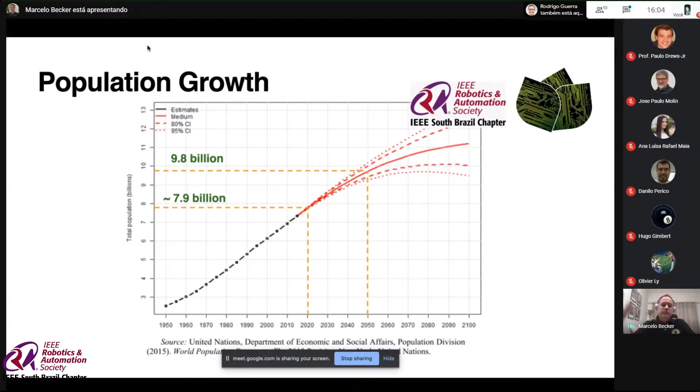But not only because of this did we decide to have this talk about agricultural robotics. It's because we have huge population growth. Today we are around 7.9 billion inhabitants on Earth, and by 2050 we are going to be almost 10 billion people. We need to feed all these people. If 5 years ago we had around 800 million people who couldn't get enough nutrients for a good life, today the situation is much worse. So we need to work on this.

According to the UN and FAO, we need to increase our food production by around 70% by 2050. But we should remember that increasing production doesn't mean increasing the production area. We need to increase productivity, and we need to take into account climate change and environmental issues.

So one good idea is to use robots. In our lab at USP in São Carlos, we work in this field, and we have many robots there—some we built, some we bought. But we know it's not easy to deal with these situations because we are talking about field robotics, and it's really tough to deal with the many problems we find in the field.

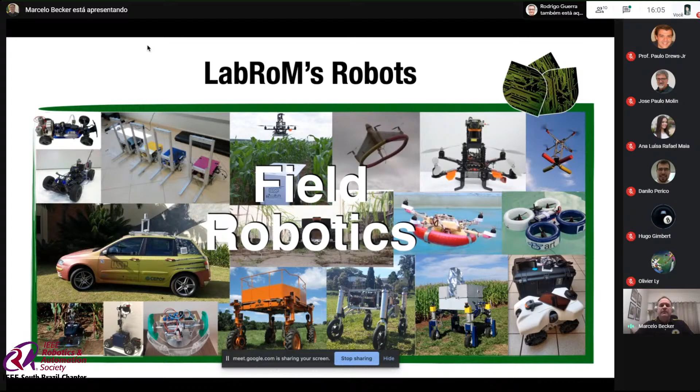So what's next in agricultural robotics? We have to face challenges: environment, perception, real-time response, sometimes autonomy, costs, and so on. Because of that, we invited great researchers from around the world to help us get an overview of what's happening, what's next, and how we can deal with this.

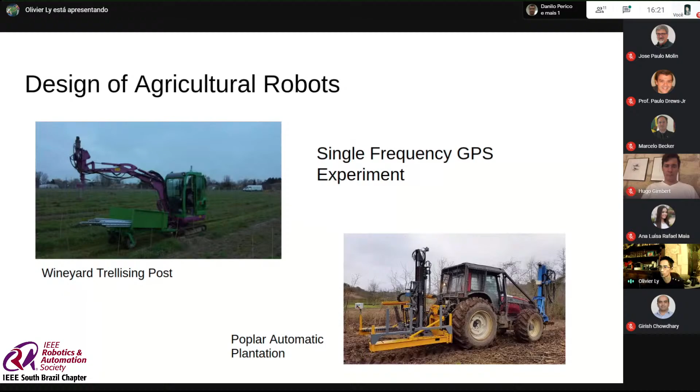And maybe I will pass the speak to Hugo to speak about that. Yeah, thank you, Olivier. Thanks for the opportunity to present our work.

So something which might be specific to French agriculture with respect to the context in Brazil is the huge development of organic farming in France. And it clearly creates new challenges. This is the national policy to drastically reduce the use of chemicals in agriculture before 2025, and even to stop the use of glyphosate this year in 2020.

So it means that more and more tasks should be, in the short term, handmade. For sure, it's a remechanization process of agriculture, because organic farming means less chemicals or no chemicals. And another thing which is specific to the French context is that the cost of labor is very high.

Is there a question, or I've seen a question popping up? Yeah, we can check the questions after your presentation, no problem.

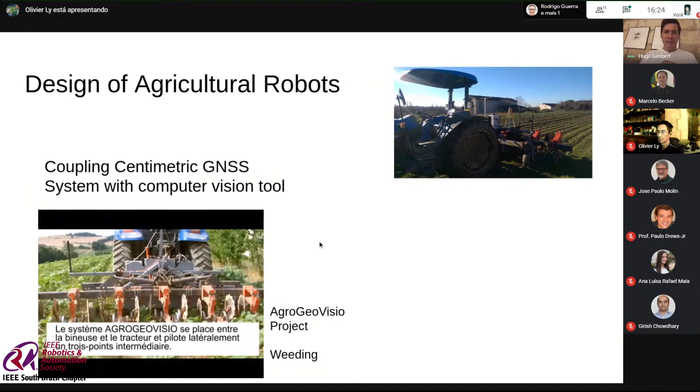Can you switch to the next slide, please? Olivier, can you? It doesn't work? Okay. Yeah, and I want to spend more time on this project because this is a project we are working on these days. The project is to be able to mechanically weed in the rows.

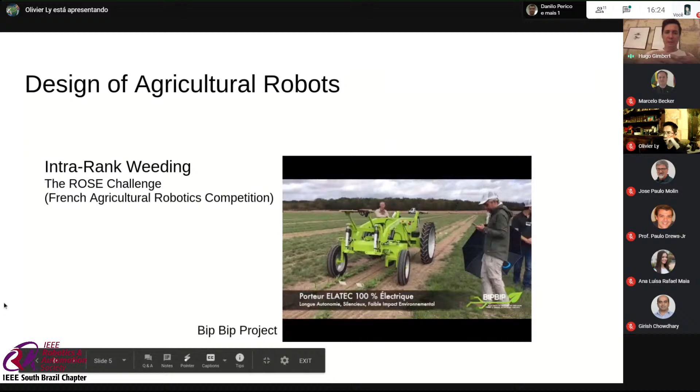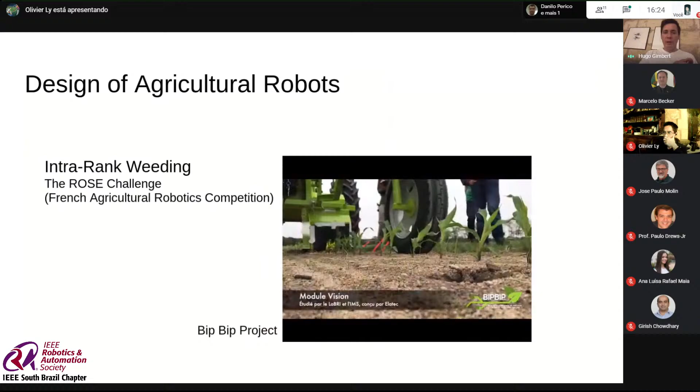It's intra-row weeding, so we are weeding between the plants, not just between the rows, but between the plants themselves. So for that, we need high precision. We use a vision system which is able to discriminate between the crops and the adventices, using neural networks. And the challenge is, of course, to detect and distinguish between crops and adventices, but then also the action, being able to precisely have an action at this precision.

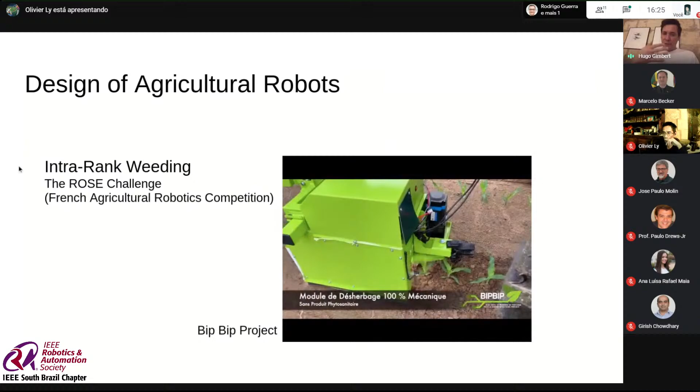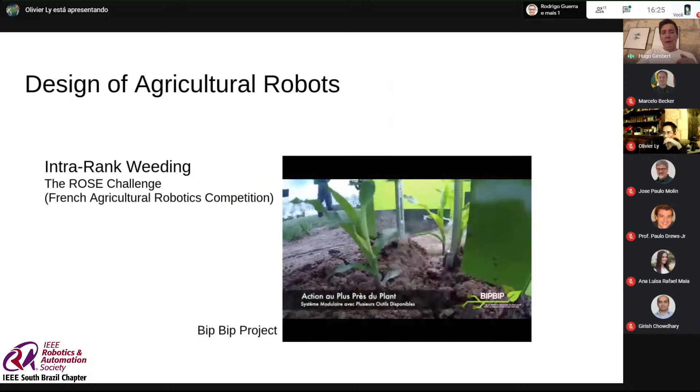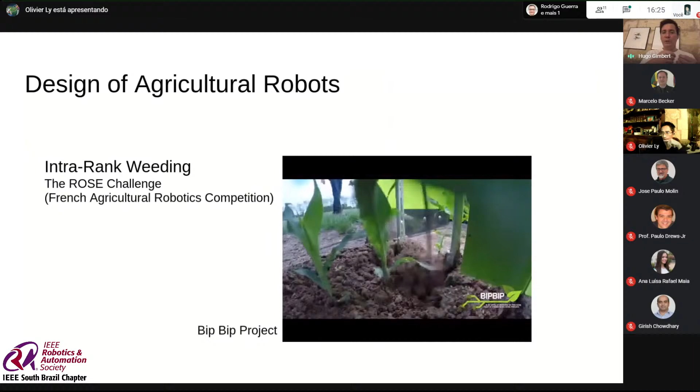It's like the other order of magnitude: centimetric precision of the action of the tools is quite a challenge, actually, because we are moving at the same time and the ground is not flat. And it appears that even if you are moving at quite low speeds, like 1 meter per second, having centimetric precision means you need hundredths of a second precision in the control chain, in the detection and action pipeline, which is not so easy to do. Yeah, and can you move to the next slide, Olivier?

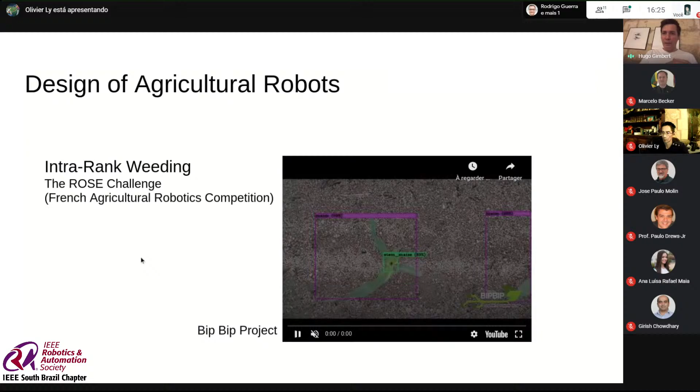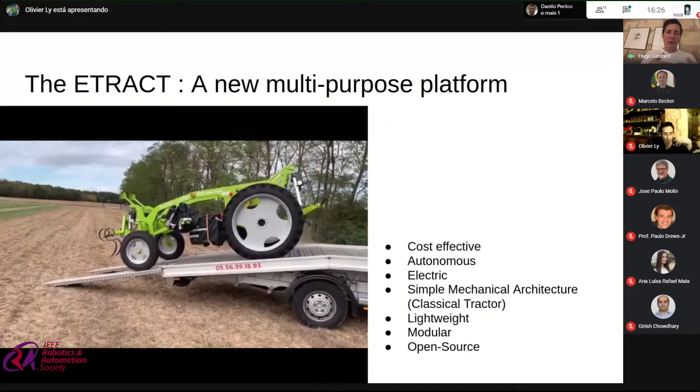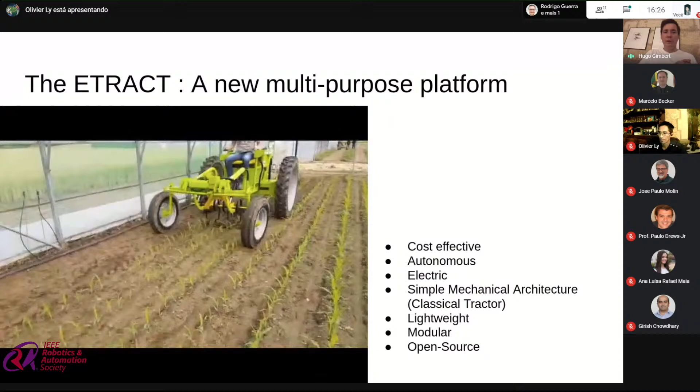And to get this precision, somehow a game changer is that we have our own platform, which is an electric tractor, able to operate at low speeds, which may be funny, but it's not so easy to operate at low speeds on a conventional tractor. So we are very happy with this electrical tractor, which is autonomous, so it's not a problem. We can let it work for hours without an operator, and even if it's quite slow, moving below 1 meter per second, economically it's tractable because there's no operator involved, so no salary to pay.

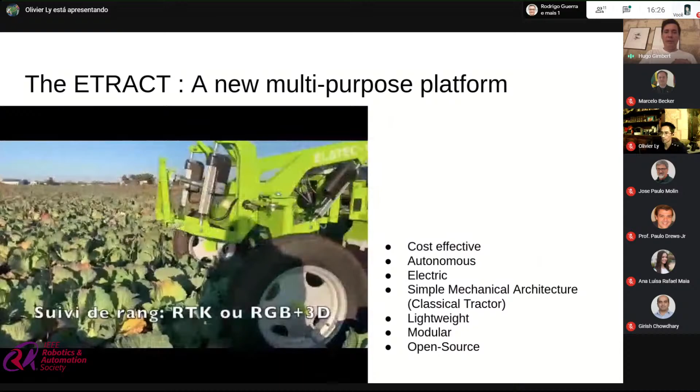Plus, the navigation is very precise. It's actually much more precise than what you can get with a human operator really driving a conventional tractor. Is my time over? I guess it's... Well, if you can finish the presentation, no problem. Okay.

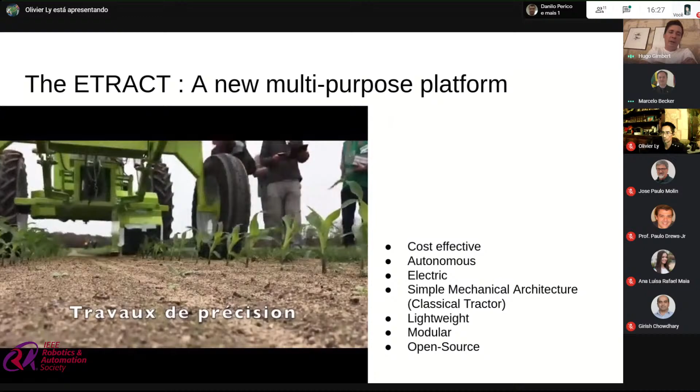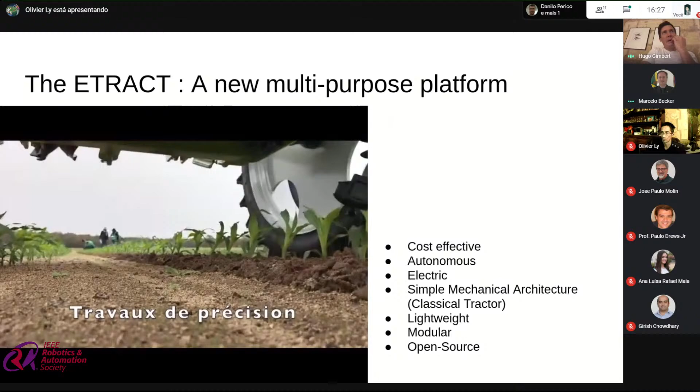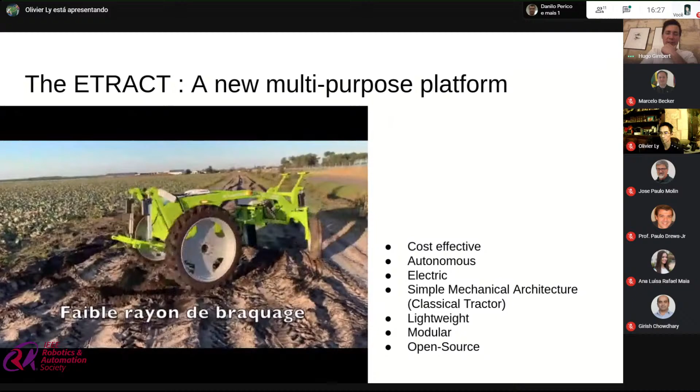As a conclusion, what I want to say is with those projects, we are between research and industry. It's almost state-of-the-art techniques that we are using. And the challenge is to find solutions which are also economically tractable for the companies we are working with. At least in France, it's a challenge because even with a strong political incentive, it's not so easy to go from the lab to the product. And still, that's our ambition. We have actually started selling this ETRACT to research centers, not only ours but other centers. And we would like someday to see them in the fields in France by dozens, and we'll see if it happens someday.

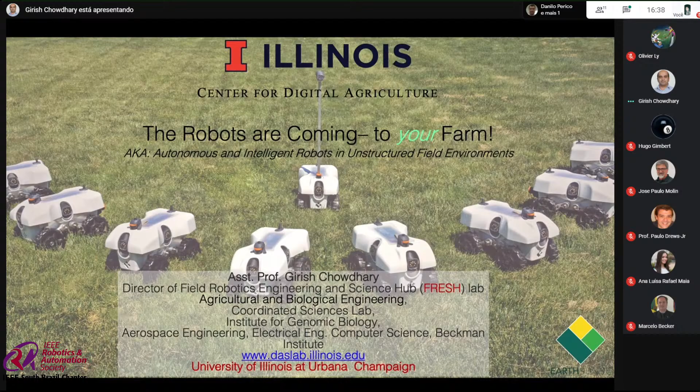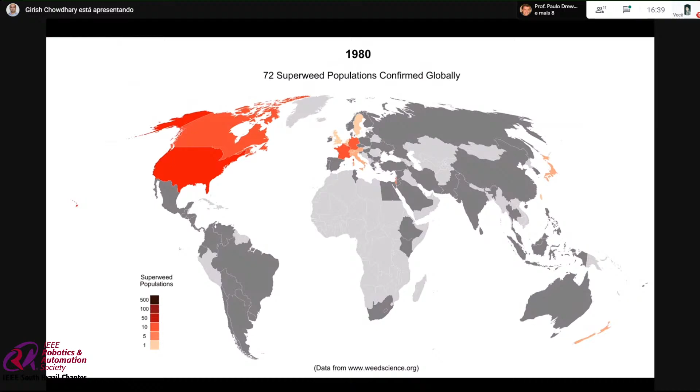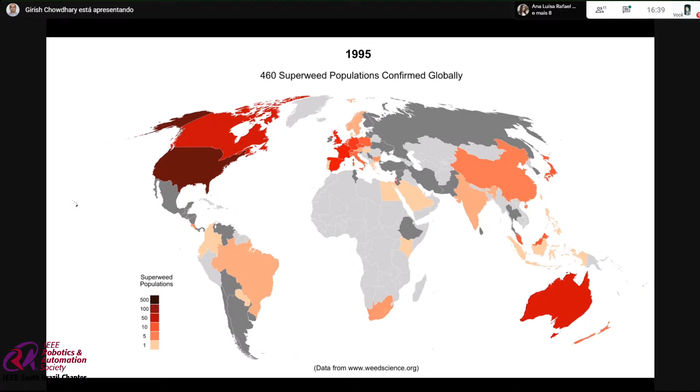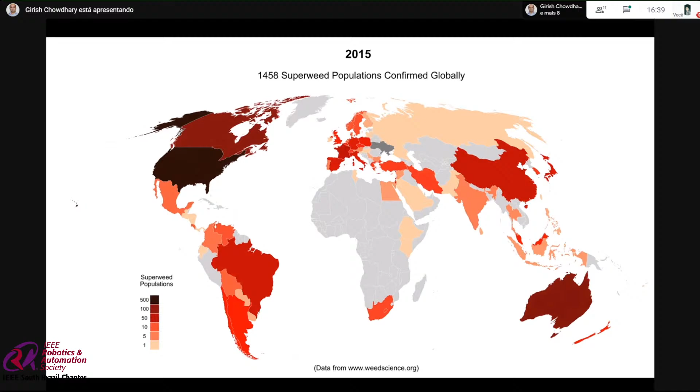So as you know, we're here in the Midwest in Illinois. There's a very large acreage of corn and soybean, and similarly in most of the Midwest—Nebraska, Kansas, Iowa, Indiana—we basically live in what many people nowadays call a corn and soybean desert. Most of the acreage we just plant with large equipment, and that's leading to a lot of problems. You probably heard about nitrogen in the seas and pesticides in your food, but one key problem that's really becoming noticeable is the rise of herbicide-resistant weeds.

These weeds are not controlled by known chemicals, and they're really affecting not only the bottom line, but also overall questioning the sustainability of the practices we're using today. And of course, on the other side of the world, in India, Africa, and many parts of Asia, a lot of the work is done by human labor, which is also not very sustainable and in some ways can be very exploitative.

The work that my group does, and also the Center for Digital Agriculture—we recently got an AI Farms Institute—and the company that I co-founded, EarthSense, we all believe that robotics and AI will make farming sustainable and profitable. Our overall idea, just a cartoon, is that there will be small robots, teams of small robots in fields that can scale up and down. I think we've already touched upon that idea with other people, but I think what's interesting is the path that we would like to explore from our research program.

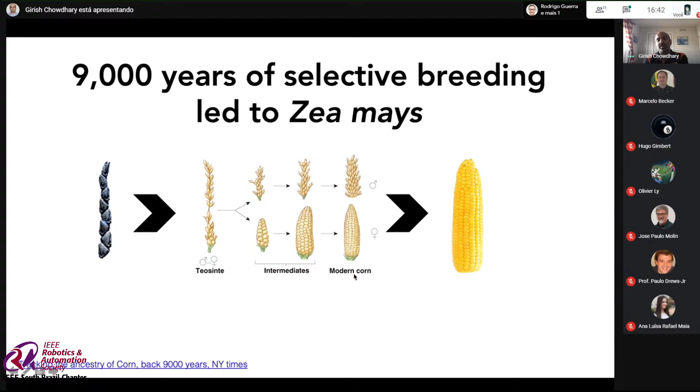As we know, corn, the dominant crop in basically most of Midwestern United States, is actually not natural. Not only is it not natural to this geography, but it's bred from this plant, teosinte, by ancient Americans who bred it 9,000 years ago with different plants, and 3,000 years ago we have modern varieties of corn coming up. So this breeding process is really at the root of agriculture.

In the United States, and maybe Brazil and Europe, we have seeds that are bred for that environment. But when you go to Africa and Asia, you see often that the yields are twice or four times less, but the population is really increasing.

To deal with this, scientists are trying to solve the genome-wide association problems. So they're looking at which genes are responsible for which phenotypes, which could be crop physiology phenotypes like plant growth, plant height, plant stem width, plant leaf area.

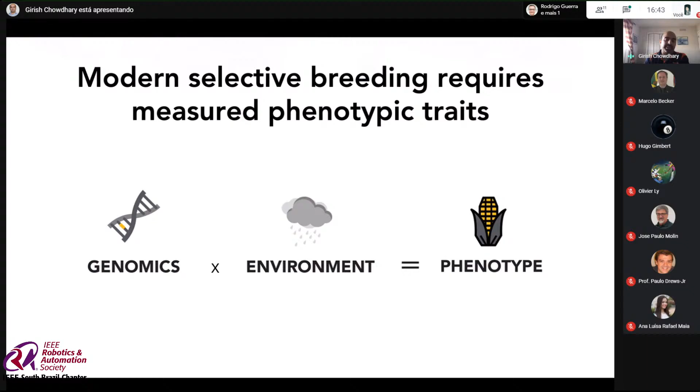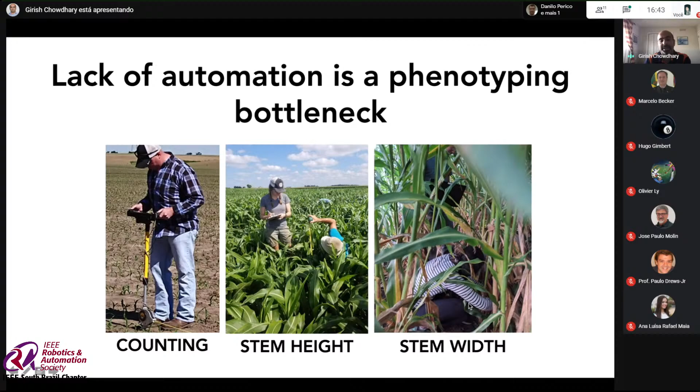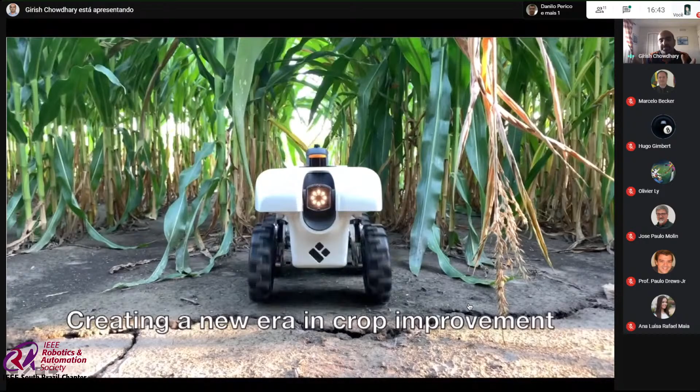So what we've been doing is creating a robotic system that can go under the canopy, because a lot of these measurements are really close to the plant. You have to get under the canopy to get them. And then creating the AI that will take those measurements and give the plant breeders a quantitative result.

So this is the robot TerraSentia that we've built at this point. We've made over, I think, about 90 of them. This year we made 45 of these robots. It can go through rows without GPS.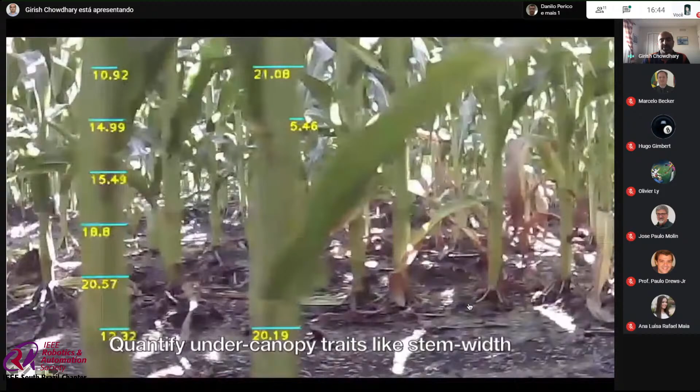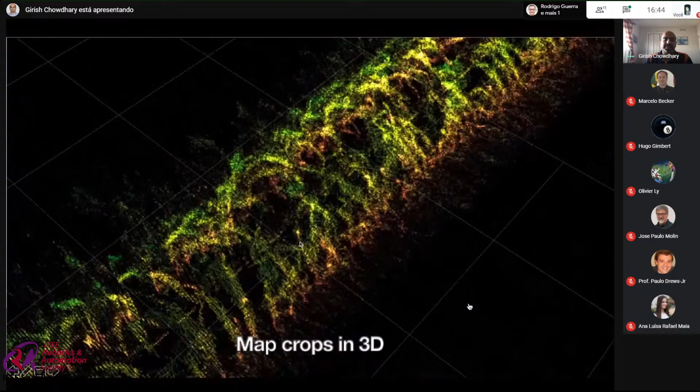The other part of what we've done is the AI that takes this data, the vision and the LiDAR and all kinds of other data that we collect, and converts it into quantitative measures. So before you were looking at stem width, then you were looking at ear count, and here we're looking at 3D reconstruction of crops. And then this information is basically given to the crop scientists.

There's several things that we've learned along the way. One of the things we've learned is the power of the small. So we made this small robot, inspired by drones that fly in the air. A lot of people were like, it's never going to work in field conditions. But we learned a lot about how far we've gotten with manufacturing techniques, with brushless DC motors, and robustness of computers, that we realized you can actually make really small, low-cost robots that are superiorly ruggedized.

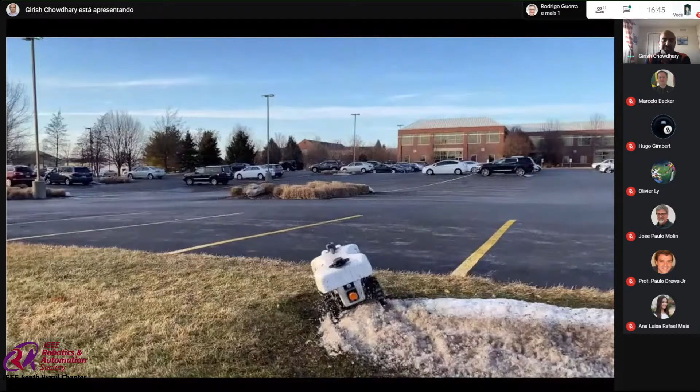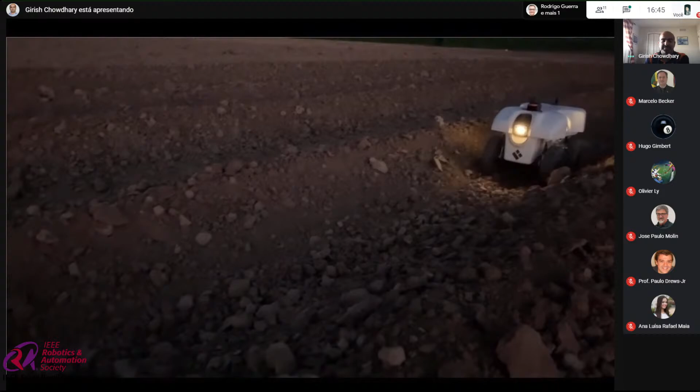So here are some examples of this robot basically driving through snow, driving through really dry and muddy or clumpy terrain, driving in the evening, driving in, of course, tree crops.

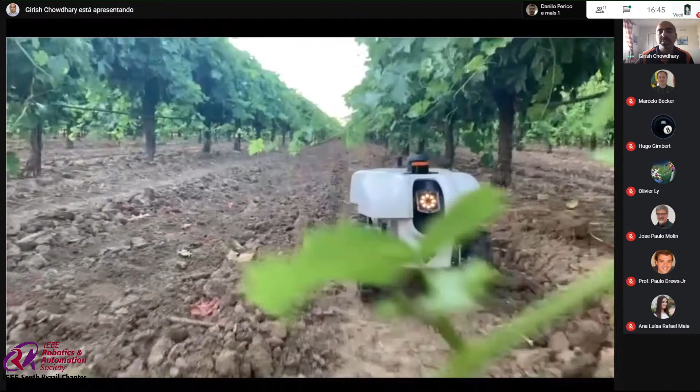We also found that this small form factor really opens a lot of doors, because not only can you get in the canopy of corn and soybean, but you can get really close to grapes, you can get through grass, you can go in tree crops, and most interestingly, you can actually make it extremely portable.

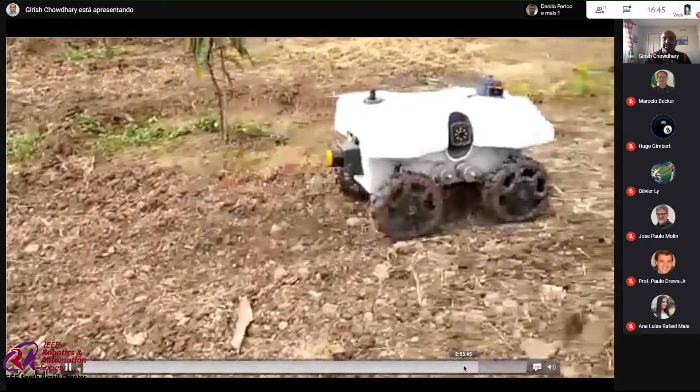So here, this is now in India, and you can see that it's really easy to transport the robot.

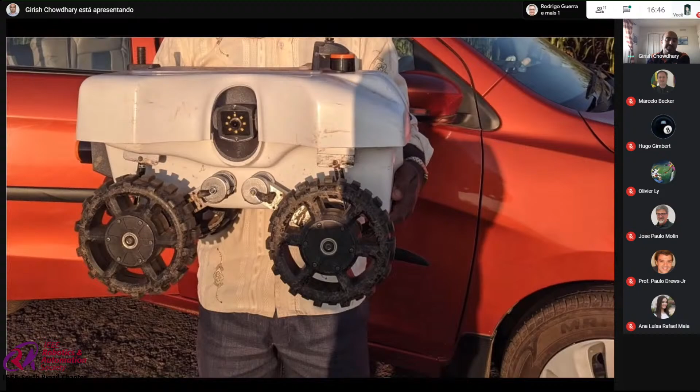So these types of robots, when you attach them with implements, could potentially serve as the new unit of work that can scale up and down. And it still remains to be seen whether this is big enough, right? I mean, for certain tasks you might need the E-Track type tractor that we saw, but there may be tasks that could be done at this form factor.

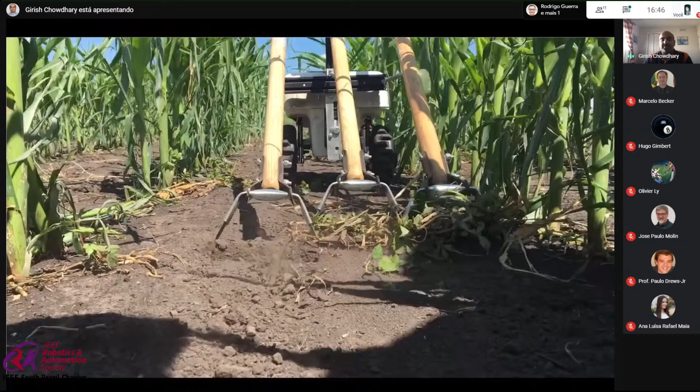And if you do it, it might be really interesting, because the flexibility and the cost of making small robots is, of course, comparable to that of making computers. And you can really crank a lot of these out at really low costs. The other thing that's good with the small form factor is not only can you bring the cost down—because if you want to impact commodity agriculture, you need to be bringing costs down to about $50 an acre.

But you can accelerate really fast the levels of autonomy, right? So we talk quite a bit about autonomy. And recently, with a couple of my colleagues, Katie Driggs-Campbell from University of Illinois, and Chinmay Soman from EarthSense, we got together and we kind of came up with levels of autonomy for agricultural robots that are a little bit more user-oriented, rather than capability oriented.

So, robots can follow waypoints, but does it really get a user off the ground? We believe that there are 5 levels of autonomy. They're very similar to the car levels, but different because there's a one-to-many interaction.

Level 1, where most autonomous robots are, is hands-off: the robot can drive itself, but somebody still needs to take control if something goes wrong, or if the robot has to do something not in the program. So that still does not get the person off the field.

The second is eyes-off. You no longer have to visually follow the robot, but you still need to be close by because it might still get into a situation where you need to rescue it. Here, the time between interventions needs to be about 50 minutes.

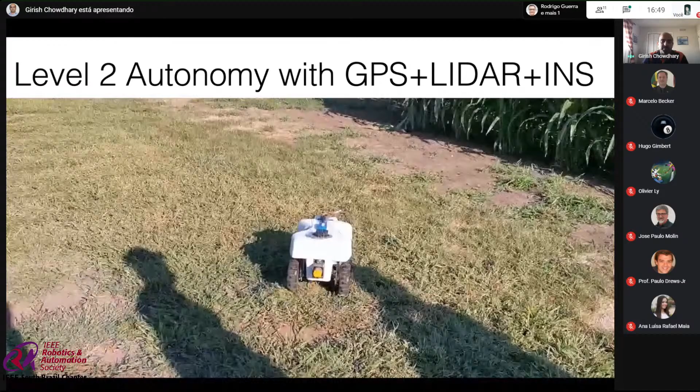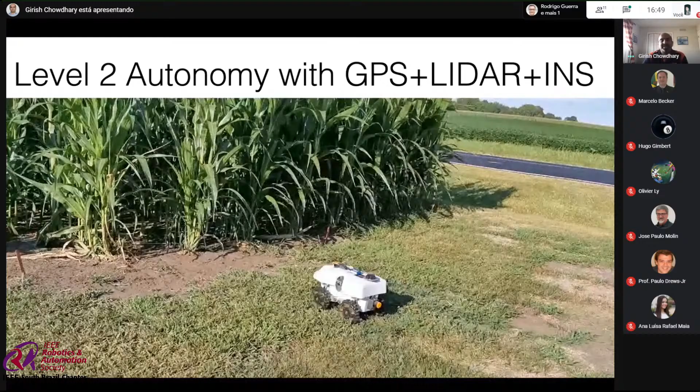We require the robot to basically make a decision on which sensor package it's going to use. Before, it was using LiDAR as it drove through the row, then switched to GPS while making the maneuver, and now it switches back to using LiDAR.

We also talk about adding AI on top so that if it makes a mistake—because it eventually will, as anybody who works in field robotics knows all the assumptions you make are wrong—at some point it will make a mistake. We've been adding AI to detect the mistake it's making and then recover from it.

The second thing we've been working on is getting these robots to work together. Here's an example of 3 of them driving autonomously in row-following mode in corn. They're not really talking to each other right now, but their speed happens to be the same, so they're synchronized in that sense. We're also getting the robots to work in the day and in the night.

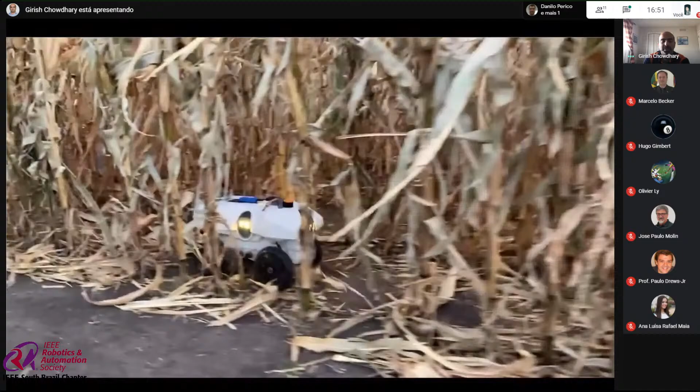Finally, something really exciting—a lot of this work, with Professor Saurabh Gupta and my student Arun, is trying to increase the speed of the robot. This is running at 3.5 miles per hour now. One thing we found is that to increase the robot's speed, we have to move away from LiDAR and toward machine vision. It's using machine vision here, driving through the field at a pretty high speed, combining vision and inertial data to do these maneuvers.

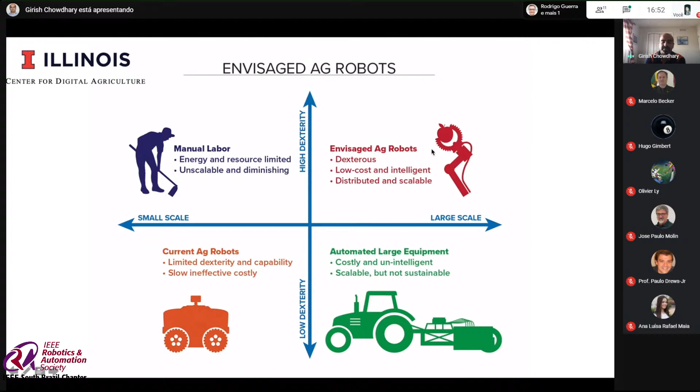So the scale problem, I think, can be solved with size and autonomy. But for dexterity, we need to make advances to the foundations of how we interact with plants.

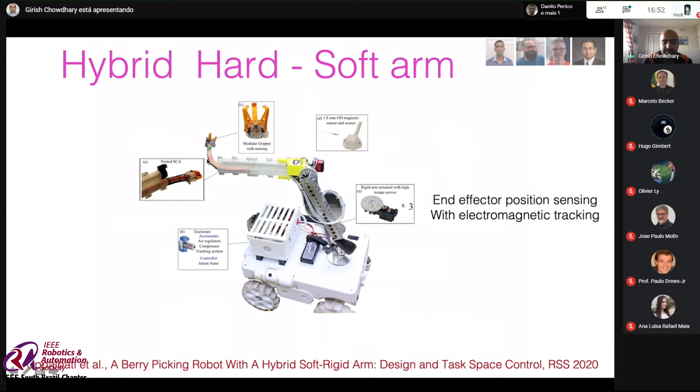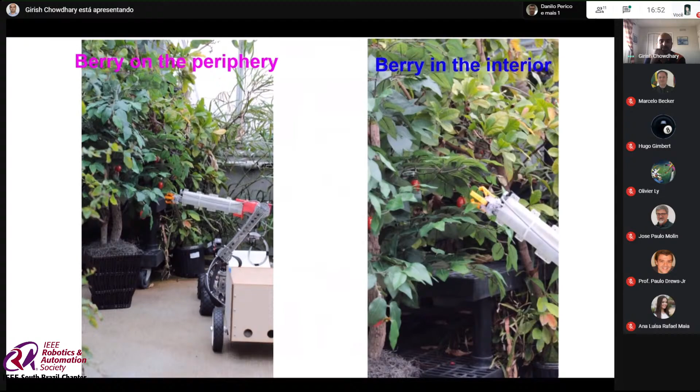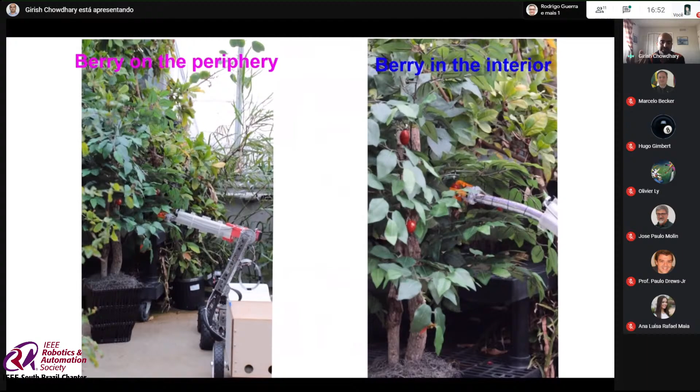In this project with Professor Girish Krishnan, we've been working on these modular grippers, these soft arm-based grippers that are inspired by octopus arms and elephant trunks, that have compliant grippers. We have this hybrid setup where the grippers can extend out of this rigid arm, so that when you are near enough the berry, you can just reach it, you don't need to extend the arm. But when the berry is not in reach, you can extend the arm, and hopefully do a lot more complicated things in the next few months to grab the berry, thereby really leveraging the benefits of both soft and rigid arms.

So just ending this, because this is about the future, I was thinking about the cascade of things that have to happen. I feel the first is really the handling of edge cases. Autonomy is only as good as the time it fails, so minimizing those edge cases, getting rid of them as much as we can, with or without learning, would be really good. Then increasing reliability of the whole system, which is very important and an underlooked thing in academia. Mostly we reward algorithms in robotics, but not so much the systems, which I feel really is changing and should change, because if we don't create systems, there isn't any place for industry to start from.

Then reducing the cost, which means using cheaper and cheaper sensors and creating better and better AI that can leverage those cheaper sensors. And then finally, we can go into problems in multi-agent coordination, human-robot interaction, and federated learning. So that's kind of the things that we're really hoping the future will bring. That's what I have.

Okay, thank you very much for sharing with us the work you are doing and your point of view. I have some questions here for you from the audience. The first one is: is environmental variability, light, terrain, different crops, and so on, a challenge for agricultural robots? If yes, could you talk a little bit more about that? What are the biggest challenges and possible strategies for tackling them?